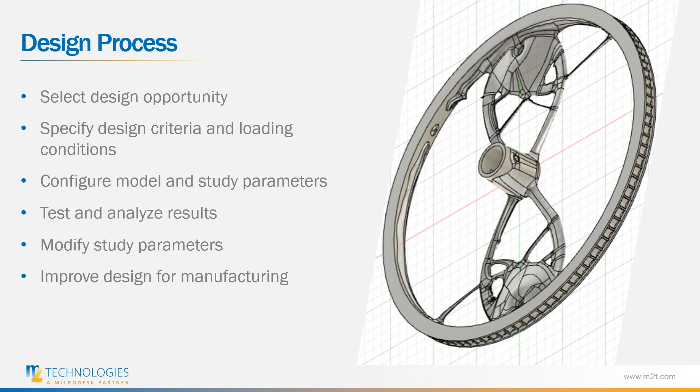So one of the biggest hang-ups when people are getting into generative design is trying to find components that would best benefit from this design process. So I put together 5 simple questions you can ask yourself when looking at a design to determine whether it would best benefit from generative design. So the first question is, when was it designed? Older parts tend to benefit the most from this process. Parts that were designed without the use of simulation, FEA, tend to more likely be over-designed, bulky, and use less complex manufacturing processes. So there's usually a lot of extra material that can be cut off of these designs.

The next question is, why use this material? A lot of times, materials are simply chosen because that's what was already used, that's what's available in the shop, or sometimes it's because that is a material that was used within the country where it was being manufactured. But for onshoring and nearshoring, that might need a change, or you might be able to just explore different material options that might provide better cost efficiency, be lighter, or be more sustainable.

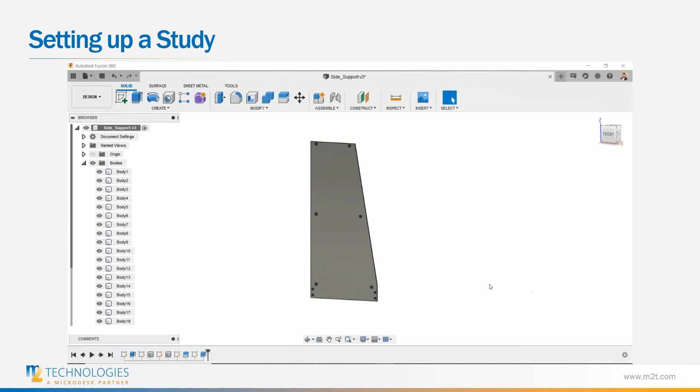Here I'm going to show you how to set up a design study in Fusion 360. We're just looking at a simple part here. It's just a sheet metal siding to a shelving unit.

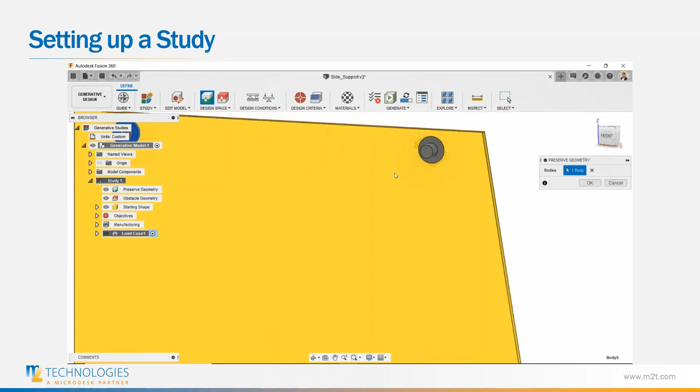So the first thing we do is we want to create the components. First, we select the main body here, which is the original geometry. So you see it highlighted in yellow. That's the geometry that is part of the original shape, but is going to be replaced with the generative design for the final product.

Next, we are selecting our geometry to keep. This is the basic generative design where we're going to put our forces and the geometry that's going to remain in the final design with the rest of the design connecting it.

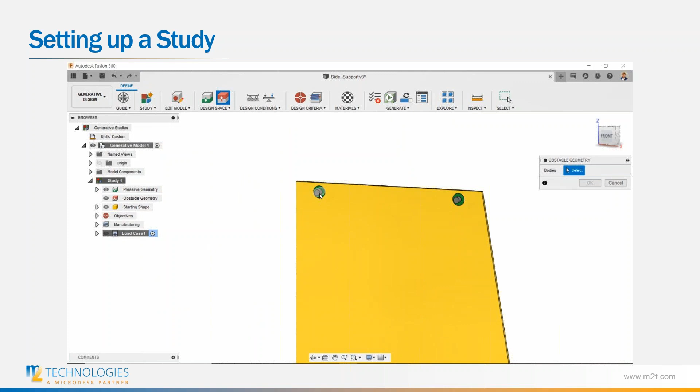And then finally, we're going to select our obstacle geometry. We want this any place where other parts are going to interfere, or where we have bolts or other connections. That way the generative design doesn't fill in those gaps. And then we can toggle the visibility on any of these sections or on parts individually.

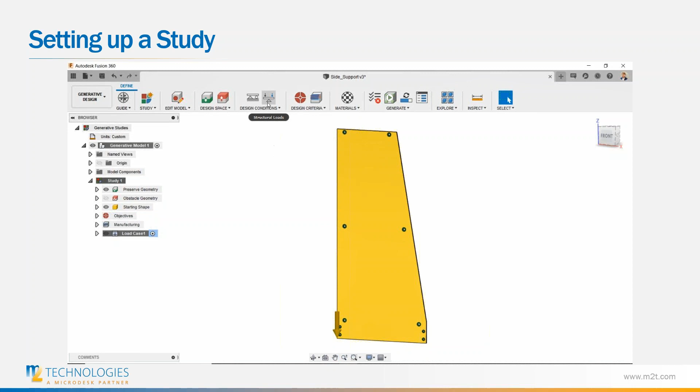Next, we want to set up the load study. So we're just going to set up a simple load study here saying that each of these shelves is being loaded with 100 pounds down, so 50 pounds per bolt. So we just select all these internal surfaces, and then you can see on our panel on the side, we can change what units we're using for the force, and we can change the direction type.

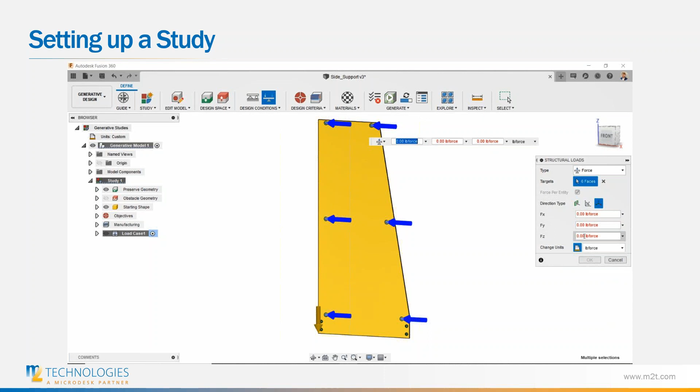So we can have it be force normal to the surface. We can have it at an angle, but here we're going to actually use the coordinate system, because we have our z-axis, which is in the downward direction. We can change the type of force to a pressure, a moment, but we're just going to keep with a simple force for now. So now we have a downward force on each of those bolts. You can see here we have our force and we have our gravity loaded in.

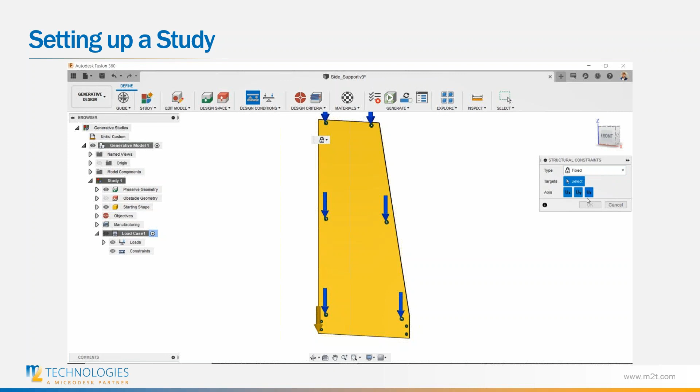Next, what we want to do is we want to make a constraint. This will be at the bolts at the bottom. These would connect to whatever is holding up the side panels here. So we're just going to do a simple fixed constraint, just so those will be held in place so that our forces have somewhere to act on. Right now we have those selected. Hit OK.

Next step is setting our design criteria. So we have two general objectives. We can either maximize stiffness, where we can set our target mass and then our factor of safety, but we're just going to go for minimized mass, where we set our factor of safety and then the algorithm runs to minimize the material used around that.

And one of our more important steps is setting our manufacturing process. So we have an unrestricted that we could use, which would allow for any kind of shape to be made. We can look at different types of milling. We have 2.5 axis, 3 and 5 axis milling, and we can set the coordinate system in which the tool bits will be coming from.

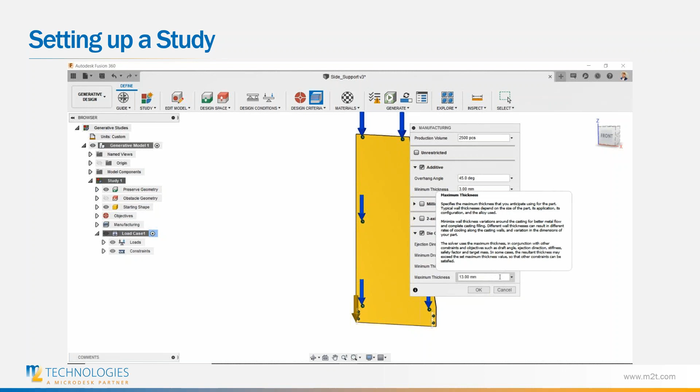We can set it for die casting, where we can set angle for surfaces, and then for this one, we're looking at 2-axis cutting. So we're going to set the cutting tool in the Y direction. And then the last one is the additive processes, such as 3D printing.

So for this one, we're just going to leave it with the 2-axis cutting, and we can change the production volume. This will help you with statistics about cost of manufacturing a batch later on. So we can go back.

Normally, we'd want to create multiple load cases for the different ways that this part might be loaded in different use. For this one, we only need the one load case, so we're going to continue. We can always create a new study or change the settings for it. And we can see our constraints here and our loads.

We're going to take a look at the gravity real quick, and we can see that gravity is already acting in the direction we need it to, so we're just going to leave it as it is. And then the last step we're going to do to set this up is we're going to choose some materials.

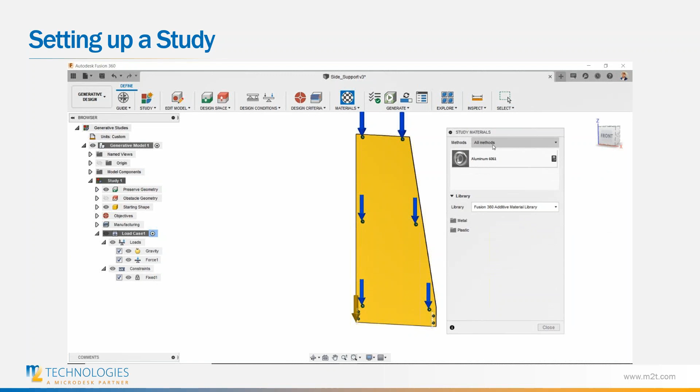So within this one study, we can try out multiple materials. So you can see here we have aluminums already selected. We'll grab a stainless steel. Now both of these are from the additive material library, so these can be used for 3D printing. So we're going to actually switch to our other library, just the general library, since we're only doing 2-axis cutting.

So you can see we have a lot of different types of materials here. We had ceramics. We're going to look at plastics. We'll grab an ABS plastic just to quickly assess the potential for changing from a metal to a plastic for this part. And lastly, we just want to grab one more type of metal. We have an aluminum and a stainless steel. So we're going to go down and grab just a generic steel. You see, it's quite an extensive library.

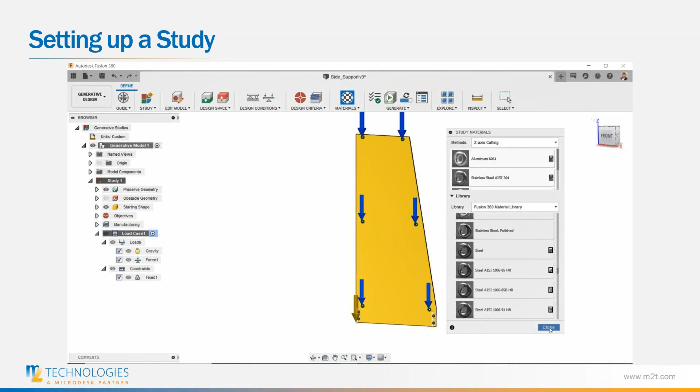So the other thing we can do is we are able to differentiate what materials are used for the different manufacturing processes we're testing. For here, we're only testing one, so it doesn't matter. And now that we have all these parameters set, we're ready to run our study and get some results from our generative design.

So once we've run generative design, it'll output a variety of results for us, and we want to analyze them. So one of the quickest ways to look at the different results from the generative design study is with the charts and statistics that are given to you within Fusion 360. Here you can see a simple factor of safety versus mass chart, and the different designs are color coordinated based on the material that was used.

So you can see both the stainless steel and the steel had a very high factor of safety, but were also both very heavy. Whereas on the other end, we have our ABS plastic, which came in right at a factor of safety of 2, but the aluminum was even lighter than the ABS plastic and had a higher factor of safety by a little bit there, just around 3. So we'll likely explore that result first.

And looking at these results, the easiest way is to look at the finite element analysis. Since we've already input the loading cases into the design when we ran the generative design, we can quickly pull up those simulations and see where the weak points are, where we might want to improve the design in the next iteration, or just moving forward to make it into a manufacturable part.

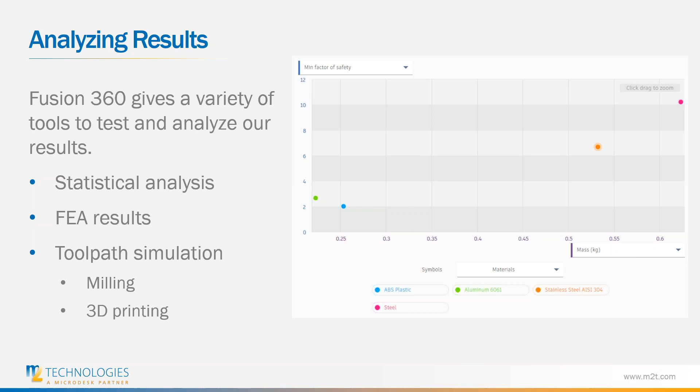And then finally, once you have selected a generative design study that you feel best fits the criteria for your part, if you have the capabilities within your manufacturing processes, you can use that design as it is. You can export the tool paths directly that you created in Fusion 360. You can use Fusion 360 to design the mold for it if it's a cast part, and you can also create the drawings for the part within the program.

Another option, however, is if the part itself captures the design criteria, but doesn't quite fit into your manufacturing process how you would like it to, it's easy to take the key features of that generative design and then redesign it for manufacturability. The easiest ways of doing this is by simplifying the geometry, removing and consolidating the small features that it tends to create, flattening features and surfaces.

So if you have abstract geometry that tends to bend in different directions, you can kind of straighten all of that out, flatten surfaces so it's easy to mill straight across. And then finally, you can reestablish symmetry. This is good for keeping a consistent manufacturing process, but also can be for aesthetics if that is important to the design.

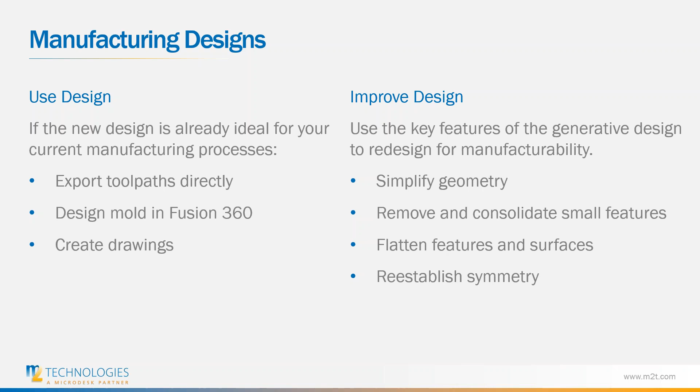So we're going to actually look at a quick case study for this elevator door drive wheel. So on this drive wheel, there's a chain that pulls along the outside. It's attached at a central axis, and then there are lever arms that connect at 2 points on this door to open 2 doors simultaneously.

What we were looking for with this was to reduce the material usage. It needed to still be manufacturable using 3-axis milling. However, other potential manufacturing processes were considered. It needed to have a factor of safety of at least 2. And another important thing was to investigate new material options, as the original part is made of carbon steel, which is a very strong but heavy alloy.

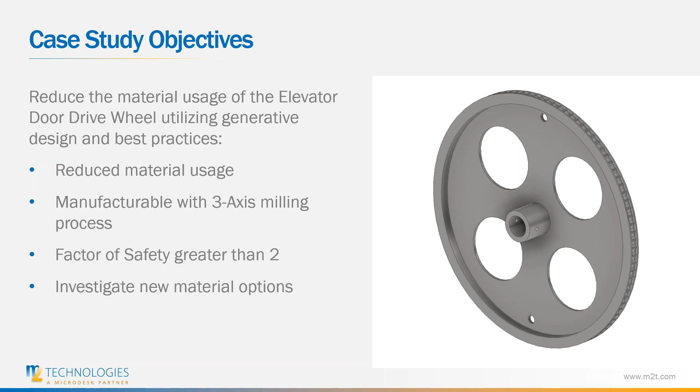So we set up the generative design process with minimizing mass and a factor of safety of 2, set for 3-axis milling. And you can see our boundary conditions: we created boundaries at the top and bottom to keep the general shape of it, as well as a boundary along the outside to make sure that material didn't fill in between the teeth. And then finally, boundaries for the connecting bolts for the lever arms and the central axis and pin.

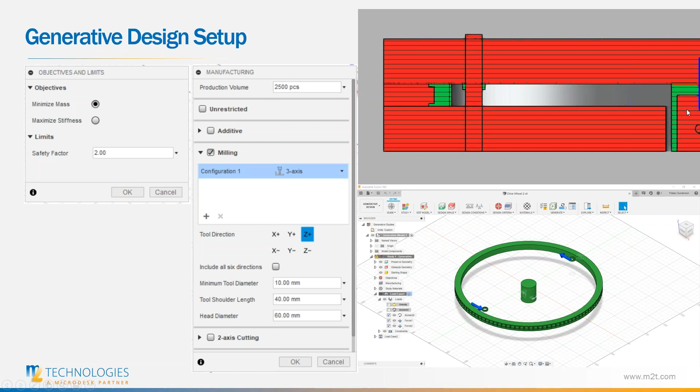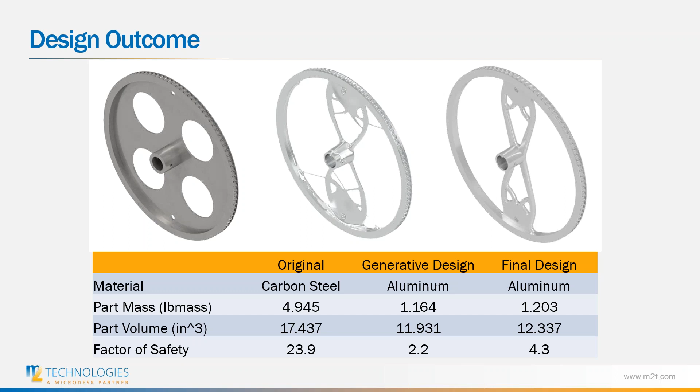So overall, this design process brings a lot of benefits. Right off the bat, it's geared towards creating lighter and stronger parts. These will hopefully last longer, but also put less strain on additional parts and require less material to manufacture. This leads to savings on the material itself, but also using less material and reducing weight leads to reduced shipping costs, and the process can also lead to more cost-efficient manufacturing processes, or by shortening the manufacturing time using the current manufacturing processes.

And very important also is the sustainability this can bring. Again, reducing material and shipping is a huge key to sustainability, but also the ability to use more sustainable materials or to utilize this in the scope of onshoring or nearshoring, which will greatly reduce the carbon footprint of shipping materials and parts from across the sea.

Also, this system has a built-in rapid prototyping phase. It allows you to quickly assess these designs within the program without having to set up additional studies, which allows you to quickly come to a final design without having to create physical prototypes as much.